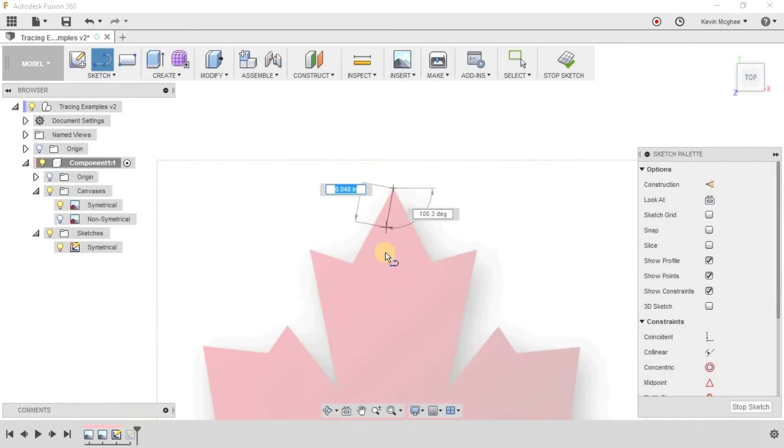So let's go into our symmetrical sketch I've already created, and the first thing I like to do is create a mirror line. So I'm going to click on line and I'm just going to zoom in, place it right about there. Then I'm going to come down below. I'll trim it off later, make sure it's 90 degrees, left click, place it. And we're good. So give it a nice little save.

Now, what I like to do is I like to make things construction lines if they're mirrors. I'm just going to click on this, click on construction, and we're good to go. Now we've got a construction line.

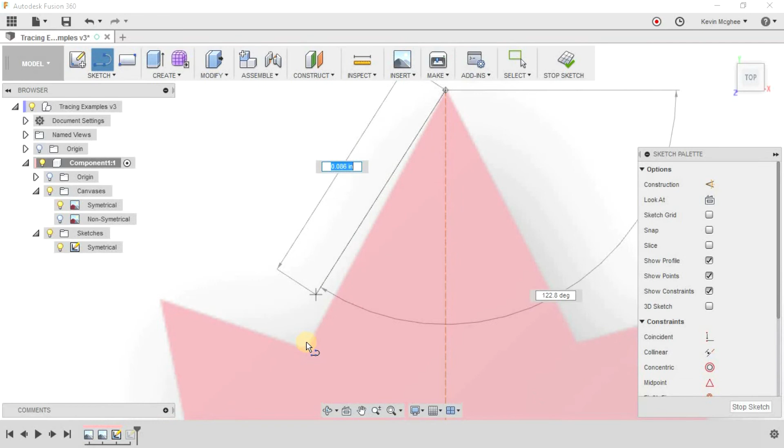Okay, so now what we can do is we can just start tracing. So I'm just going to use my sketch. And this time I'll attach directly to the end, and then I'm just going to come down and very quickly but accurately

place all of my points.

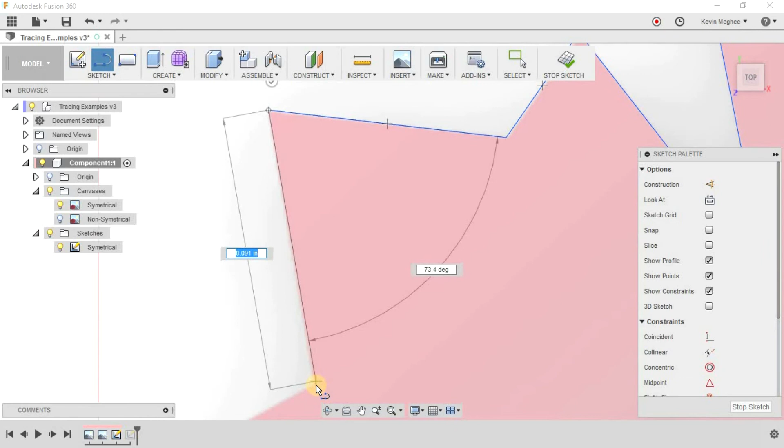And the beauty of this is that if we don't mirror it, our drawing will not be accurate.

It'll be visibly different. By using mirror, not only do we save time, but we achieve much more accurate drawings.

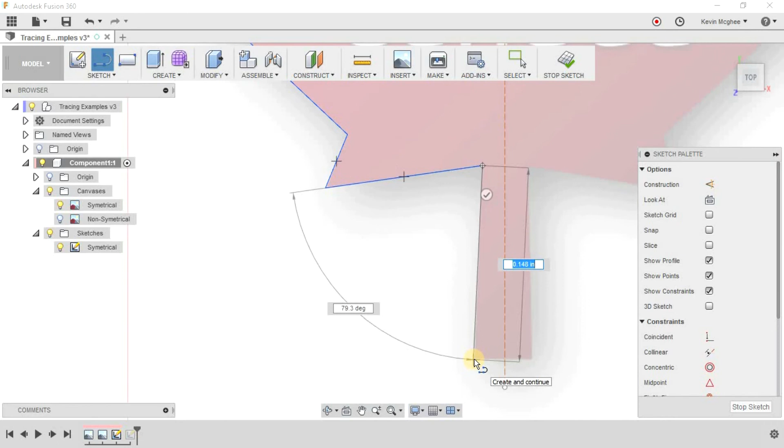So come down here, and then end. Alright, so there we go. We've got our half of our maple leaf. We'll do our save.

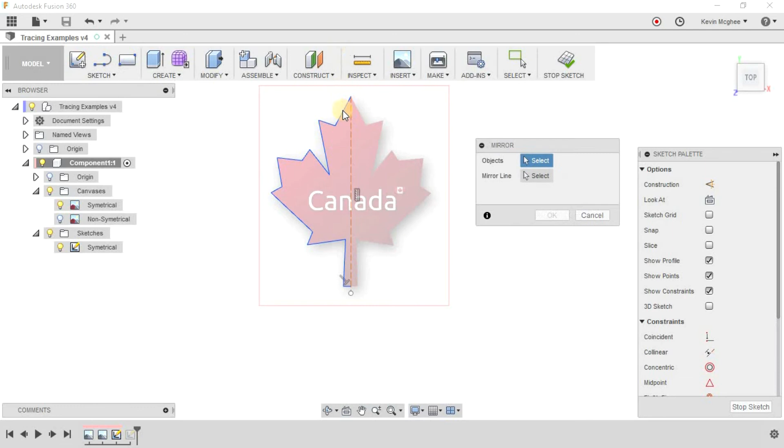And now we want to do a mirror. And as we learned before, mirror is pretty easy. We're going to select our objects. So we're going to just select them all. I could do a window select, but there isn't that many.

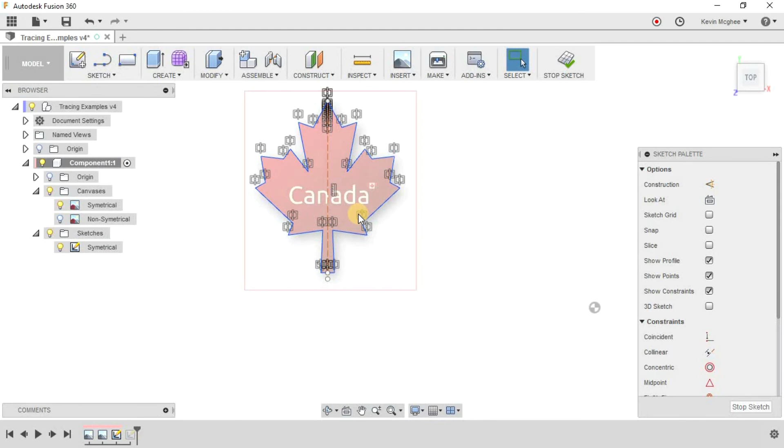And we're going to select our mirror line. And there we go. Okay. Now we've got all these symmetrical points. We don't need to, let's just turn the constraints off.

So there we go. Our mirrored object. And then you can see that there's a slight variation right along here. And that's because this image wasn't drawn perfect. Don't worry about that. This is now perfect.

We'll save our work. We can turn off our canvas. And now we have a nice maple leaf that we can do something with. And you can delete your construction line if you're done, but I'm just going to leave it. So there we go. That's how to do symmetrical drawings.

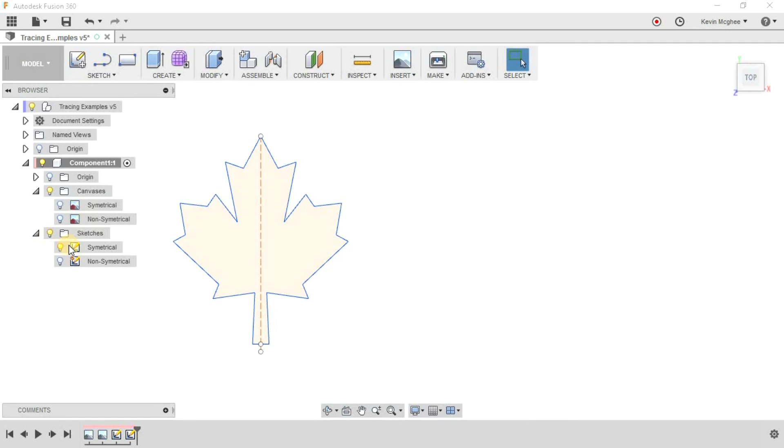Now what if there isn't anything symmetrical? So let's turn off and turn on non-symmetrical. So we've got a fish. We can't mirror anything here. There's just nothing to mirror. And you'll also notice that there are no straight lines.

So when you've got curves like this that there's no tool for, there's no arc that's exactly this, then we need to use just basic spline tool tracing.

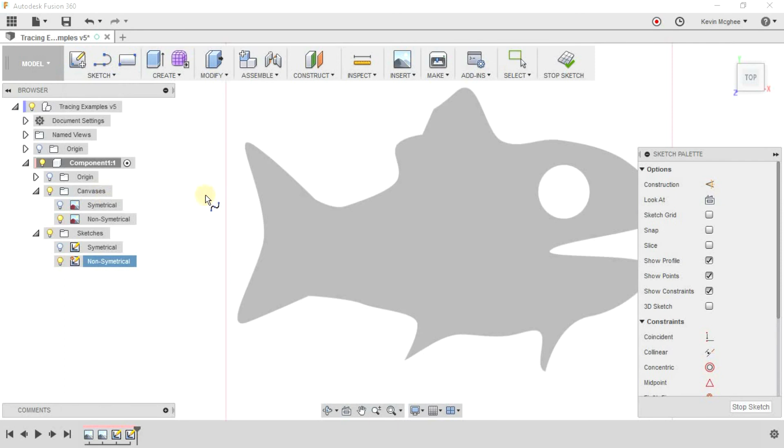So I'm going to open up my non-symmetrical, go to sketch, go to spline, and all we have to do now is just start curving our lines around our fishy here. And you can take as much time as you want.

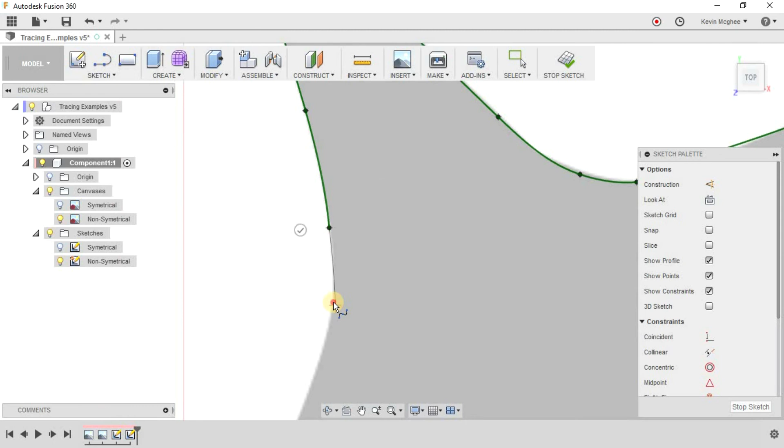In fact, you should take all the time in the world when you're doing this because it will look better, and pride in workmanship is always a factor. But I'll speed it up a little bit so that you're not totally bored.

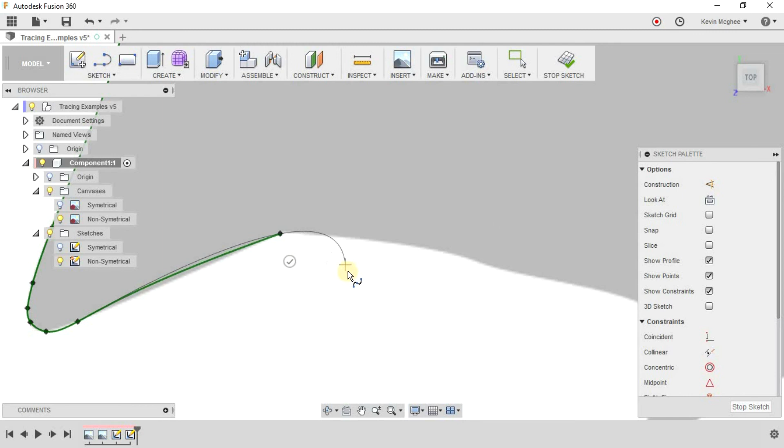Now you'll notice how we've got this really weird thing, and sometimes you get to curves where it's just not going to work. Just hit the check mark. Don't worry about these green lines. And then just start again from that point.

If you find it difficult to trace, the mouse seems to go in places that you don't want it to, there's a good chance that your snap is on.

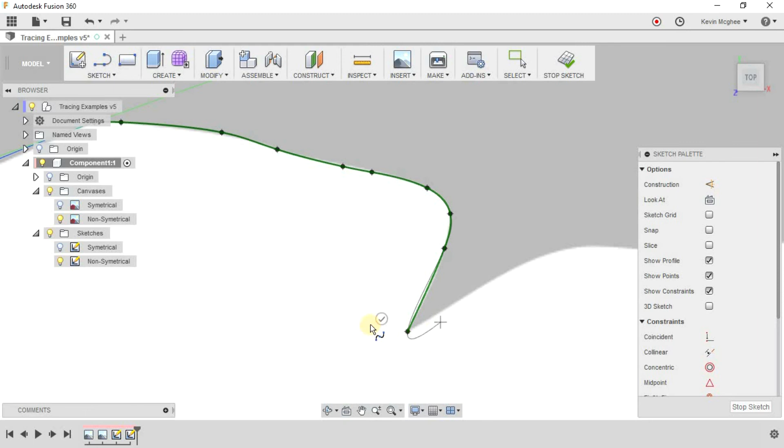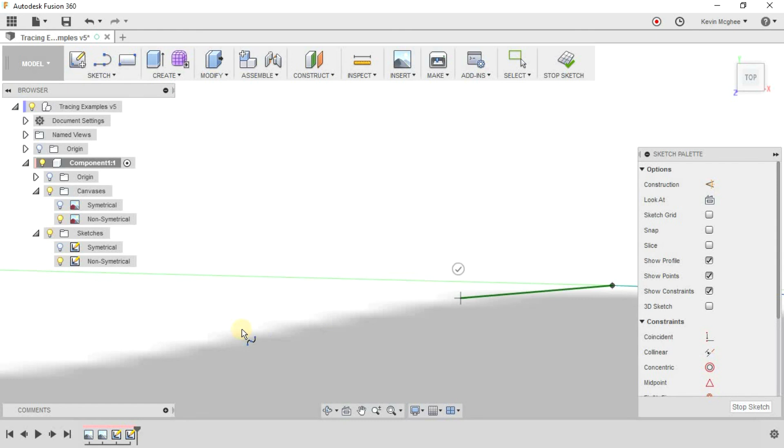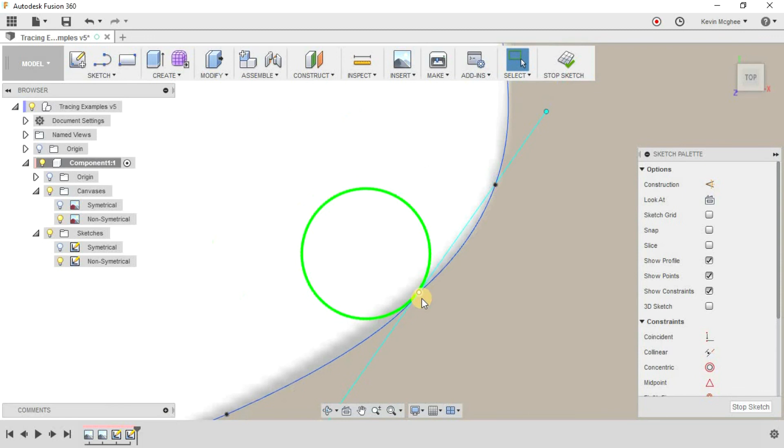A few moments later. Okay. Now if you want to make any alterations, you can grab this and you can sort of change some of the shapes and all that good stuff.

But there we go, we've got our fish drawn. For the eye, I would just do a circle, 2 point, one there, one there. Stop the sketch, let's turn off the canvas, and there we go.

We have a fish. We can expand it and do any additions that we need to do, changes if we want. We can go back into the sketch and let's say we didn't like

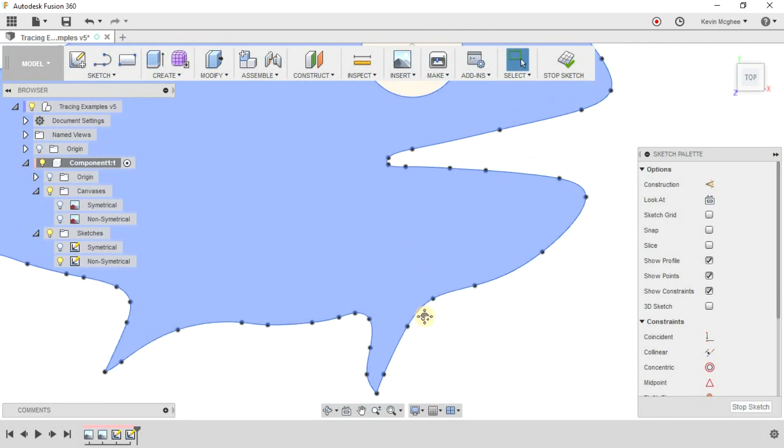something about it. Right here, it's not really all that nice. We can just smooth that out, do a little drag, a little drop. Alright, and there we have it. Non-symmetrical drawings.